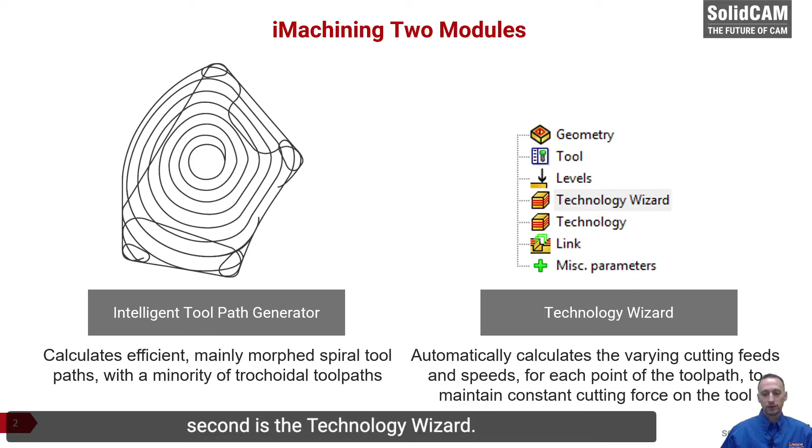So before we talk about the secrets of iMachining, let's talk about what iMachining does. So iMachining is about saving cycle time at the CNC. So here we'll go over a couple quick slides about some of the savings. So here we have iMachining 2D being used on aluminum for electronic products. And here you can see we have aluminum 6061, and this customer had 400 pieces to produce.

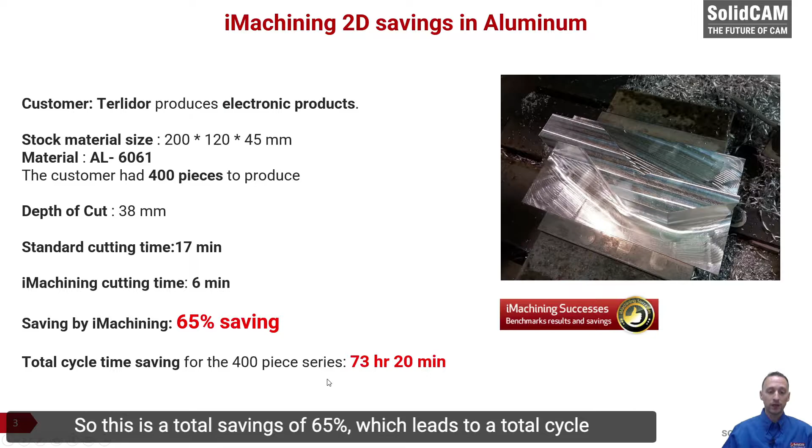Their standard machining time before iMachining was 17 minutes, and this decreased to 6 minutes. So this is a total savings of 65%, which leads to a total cycle time savings on the whole part run of 73 hours.

Here's a really small titanium little bracket. This customer had 75 pieces to produce, and this part went from 17 minutes down to 3.5 minutes, which was a total savings of 80% per part, for a total time savings for the complete run of over 16 hours.

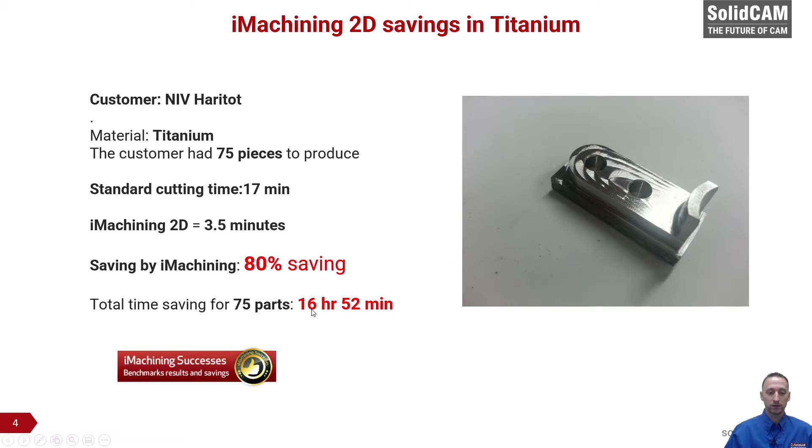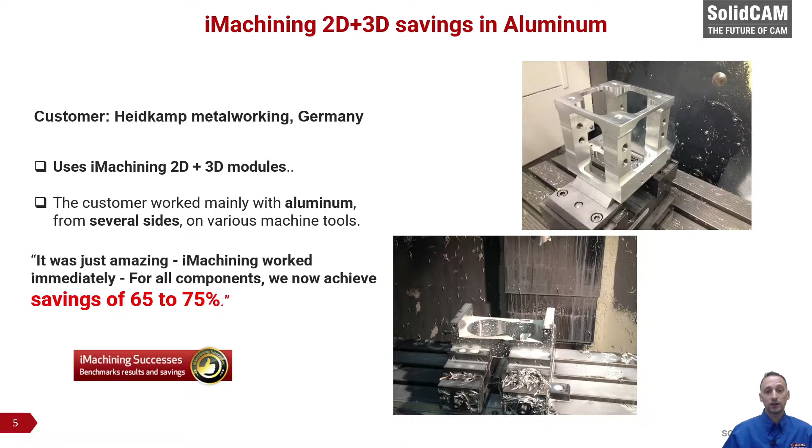We have a customer in Germany who uses a combination of iMachining 2D and 3D, which most of our customers are doing. And for them, in using aluminum parts, they're generally seeing savings of 65 to 75%. So I think what's nice to notice here is that iMachining is giving an amazing savings amount, whether you're doing soft materials such as aluminum or something very hard to machine such as titanium.

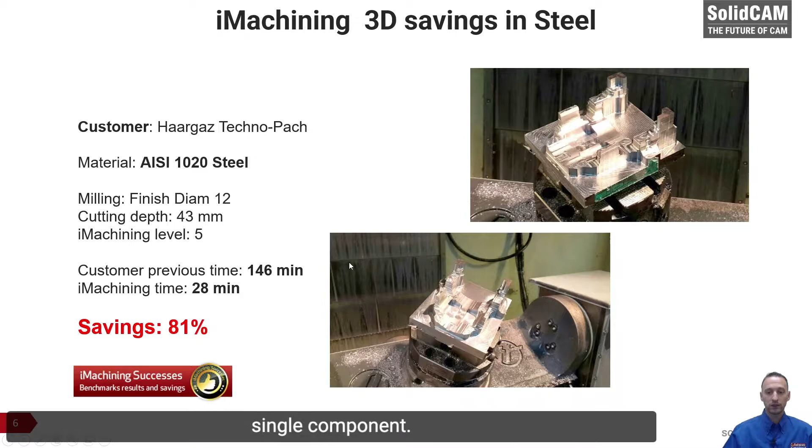Here's another part which is cut in steel, and this part went from 146 minutes down to 28 minutes for just this one single component. Now, besides the reduced cycle time of iMachining, there's another major factor on the CNC, which is reduced machine wear.

So the iMachining toolpath, and we're going to be reviewing this, is a constant load toolpath throughout the entire cutting process. So what you'll notice when most of our customers are cutting with iMachining is you see spindle load ranges in the 4 to 17%, and it stays constant through the entire machining cycle.

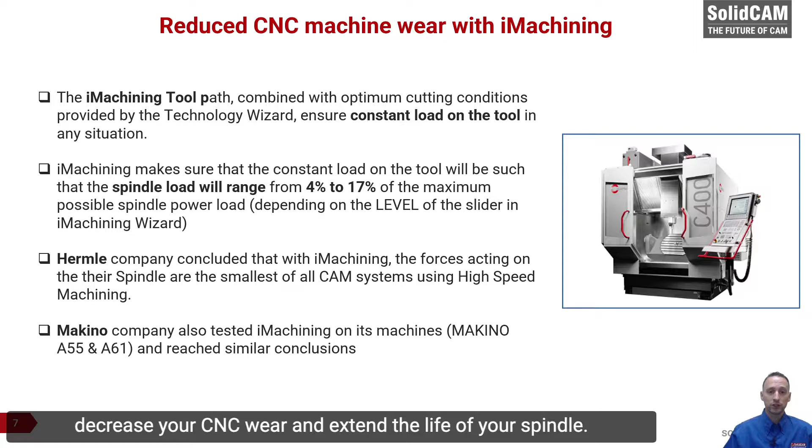Hermle actually concluded that iMachining was the best toolpath with the constant force of all high-speed machining toolpaths. And Makino also tested iMachining on its machines and reached similar conclusions. And in the end, a constant load on the spindle is going to decrease your CNC wear and extend the life of your spindle.

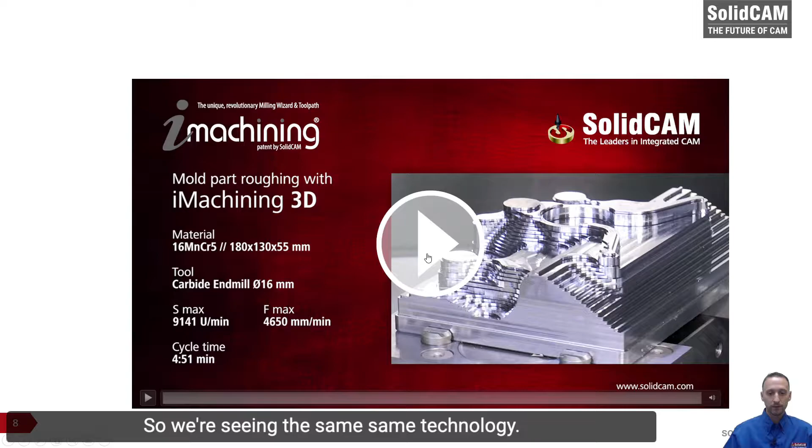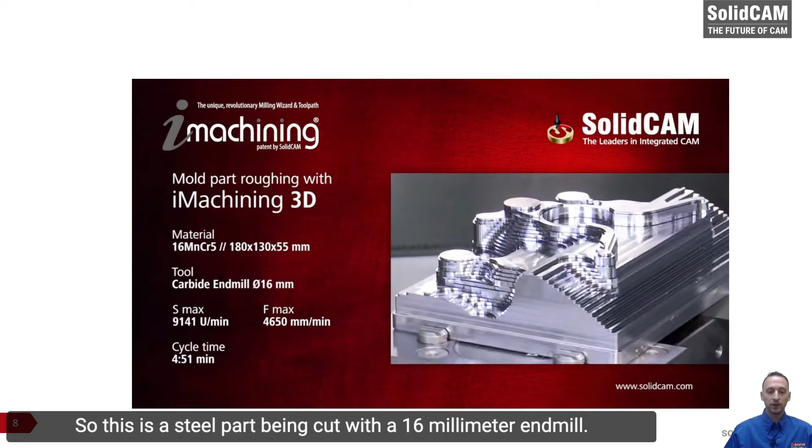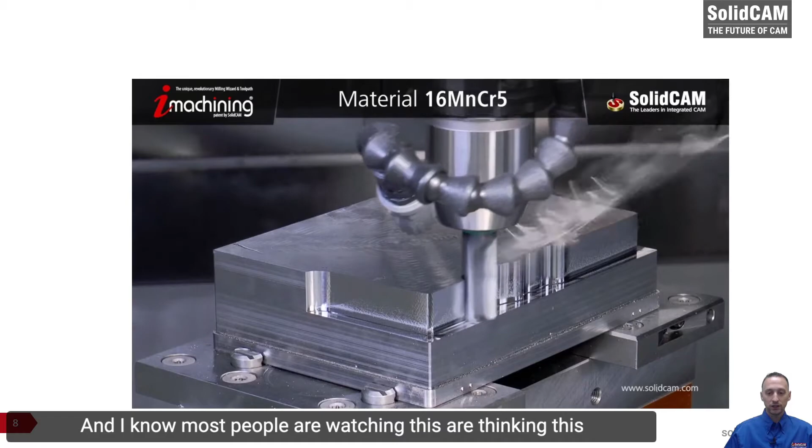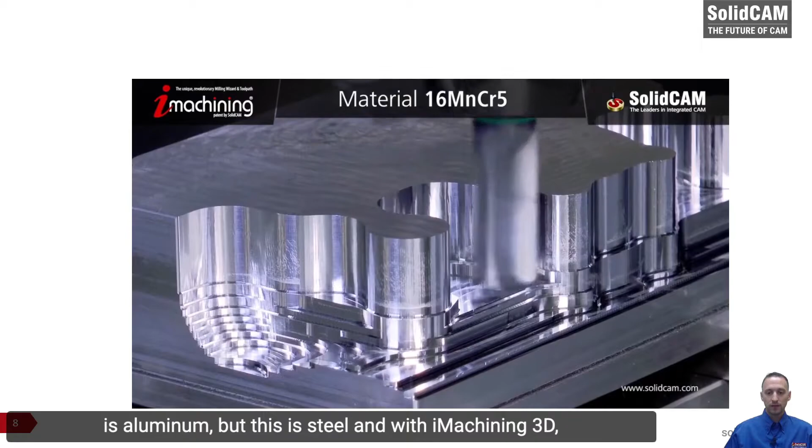So why don't we watch a quick little video on iMachining 3D. And remember, iMachining 3D is using iMachining 2D, so we're seeing the same technology. So this is a steel part being cut with a 16mm end mill. And I know most people when watching this are thinking this is aluminum, but this is steel. And with iMachining 3D, this uses our step-up technology to bring the model to a near-net surface finish.

Okay, so when we watch these high-speed machining videos online, many people are questioning, well, that's great. In a single video, you can make something amazing show. But how does an everyday customer achieve this? And I think this is really where iMachining sets itself apart from every other CAM system out there, is that our customers are achieving those results day in and day out on every part they cut. And I'm going to go over the secrets of why this works and how this works.

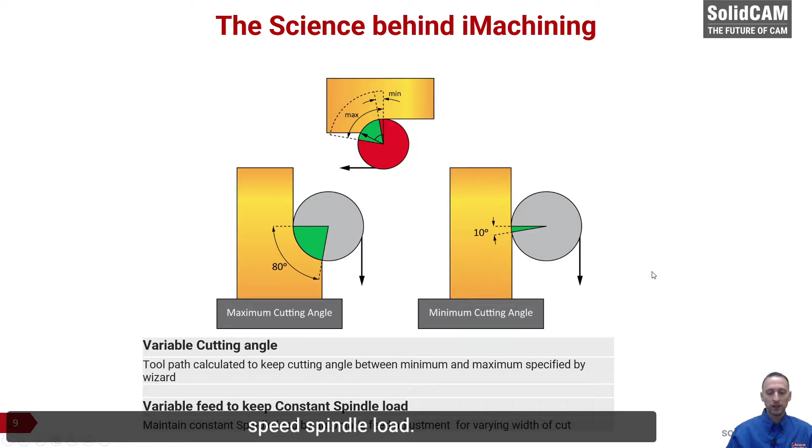So the science behind iMachining. The most important thing to note is that iMachining uses a variable cutting angle. So this means we work between a maximum range and a minimum range. And we also use a variable feed to keep a constant spindle load. Now we don't use variable feed to keep a constant chip thickness. Now, before we get into chip thickness, I have a small video I want to talk about and actually show.

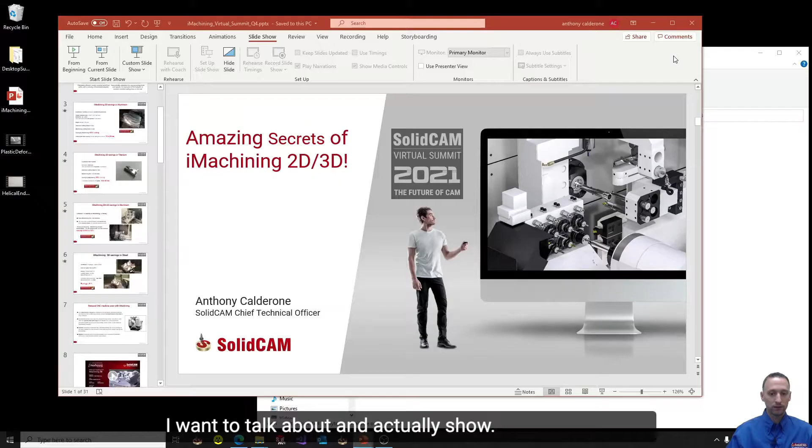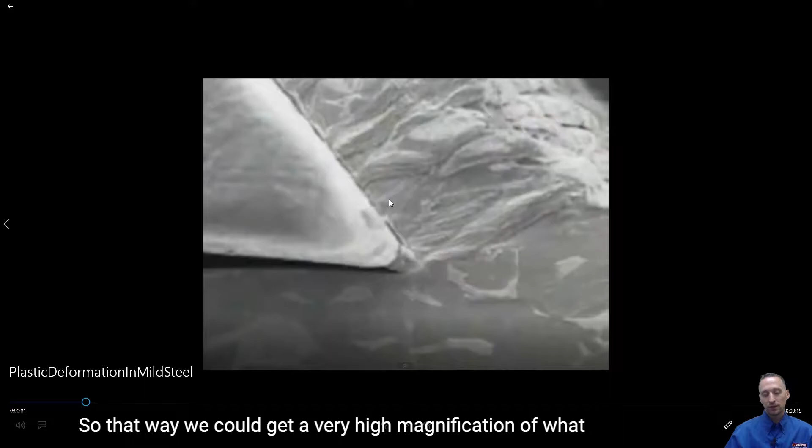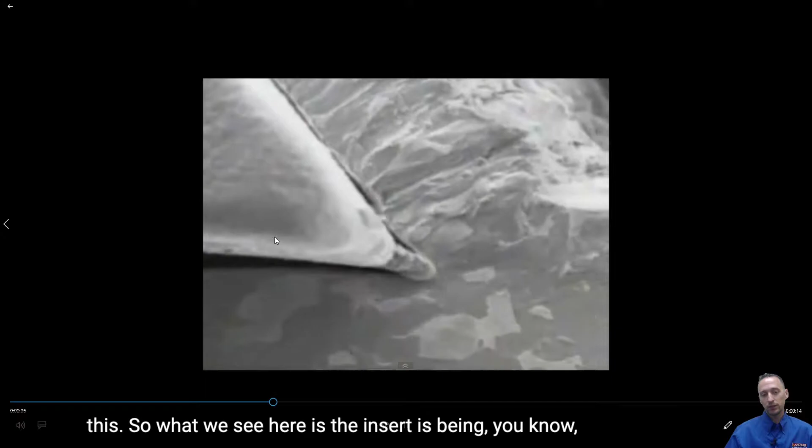So this is a close-up video of not a helical end mill, but a turning insert. So that way we could get a very high magnification of what the cutting process is. So I'm going to press play and we're going to talk about this. So what we see here is the insert is being drawn across the material.

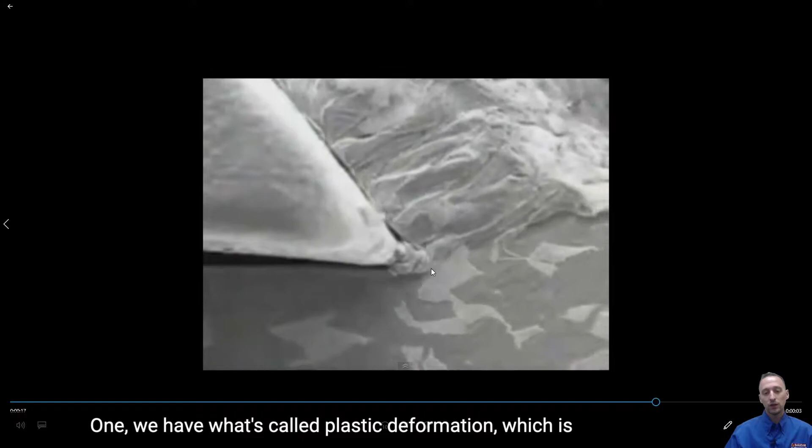And what actually happens here is two things. One, we have what's called plastic deformation, which is at the tip of the cutter, you can see that the material, press play again, is going from a solid to kind of like a soft liquid here.

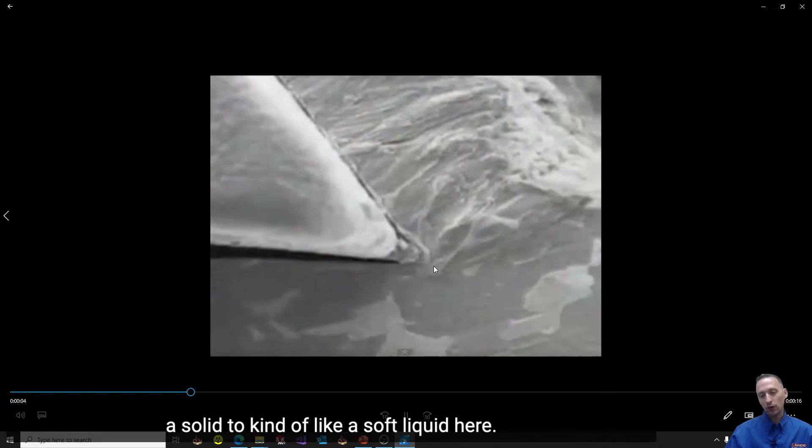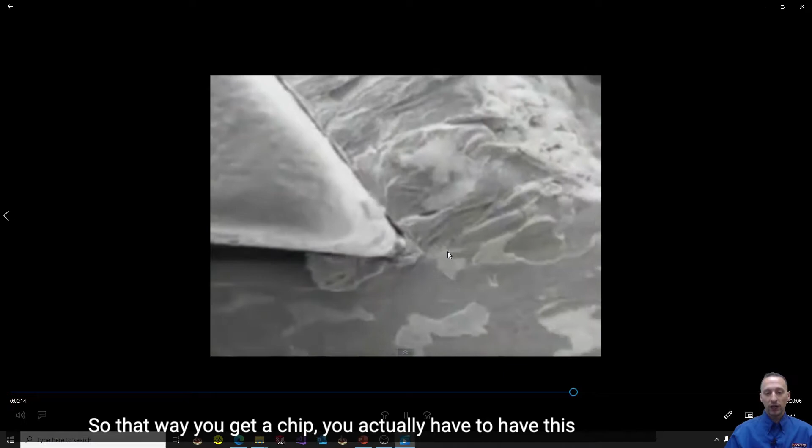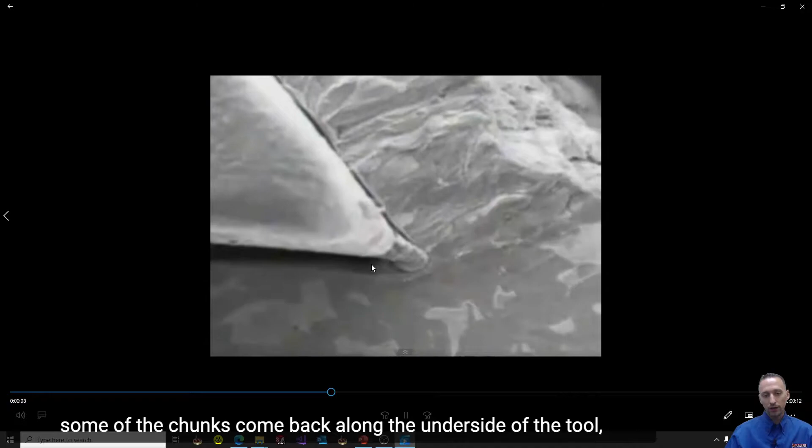And then you have shearing. So for the material to actually break the bond, so that way you get a chip, you actually have to have this plastic deformation and then the material is shearing off. As you watch this cut, what's interesting to note is that you will sometimes see some of the chunks come back along the underside of the tool, and then that rubs against the back part of the relief.

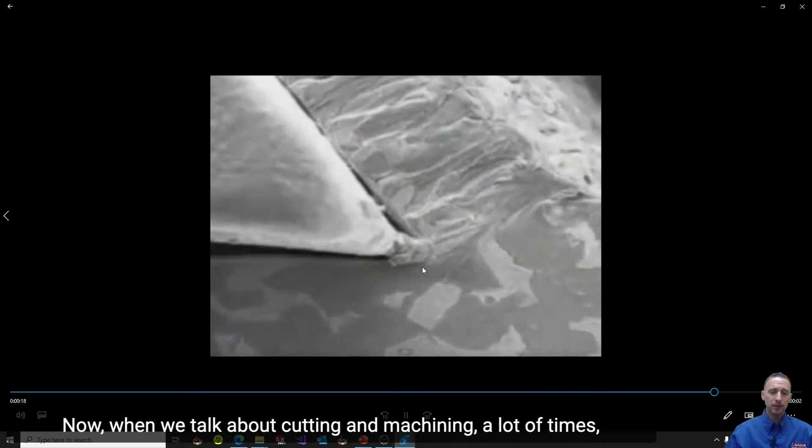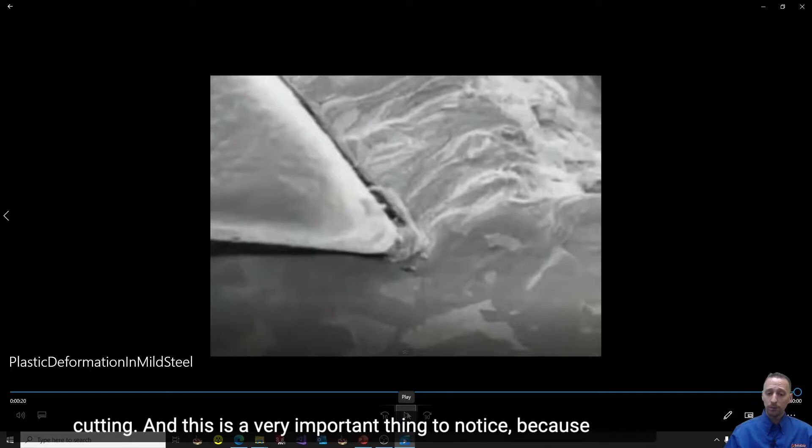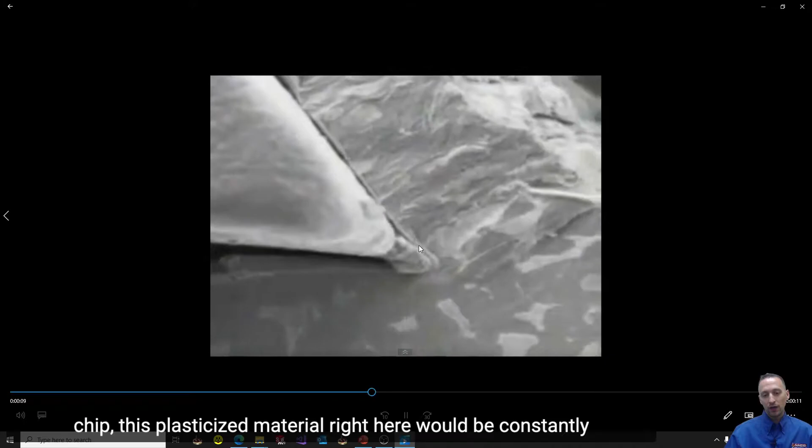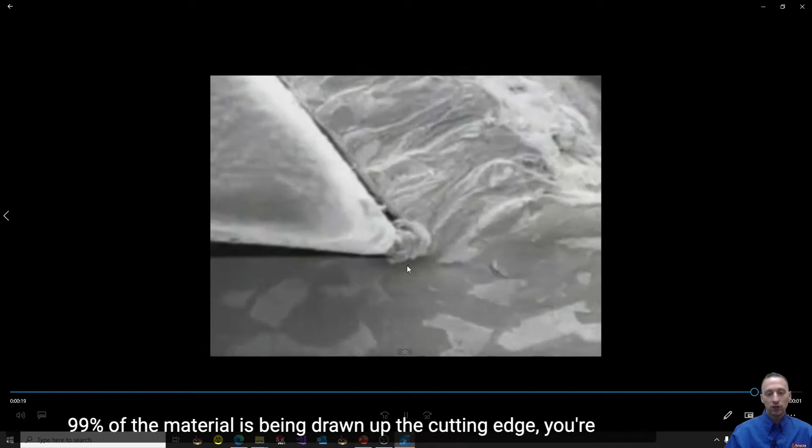Now, when we talk about cutting and machining, a lot of times people are talking about getting underneath of the material, like pulling enough chip that the tool is actually cutting. And this is a very important thing to notice, because you could imagine here, if we weren't taking a big enough chip, this plasticized material right here would be constantly rolling around the bottom, and instead of getting a nice shearing effect where 99% of the material is being drawn up the cutting edge, you're getting maybe half of the material, some will come up, some will go down, and this is a problem.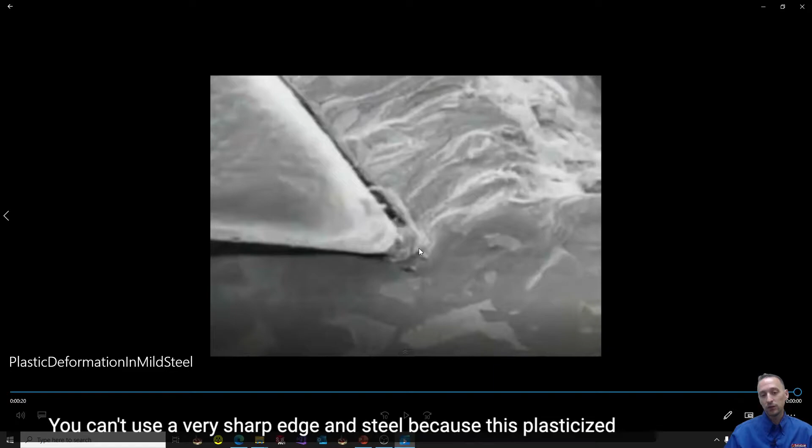And now when you do look at different tools for different materials, you'll see that this corner radius will change. Obviously with aluminum cutters, you have more of a knife edge here, and in aluminum they're able to cut more than having this brute force kind of shearing effect. But you can't use a very sharp edge in steel, because this plasticized material in steel will end up breaking down that cutting edge much quicker than it does in aluminum.

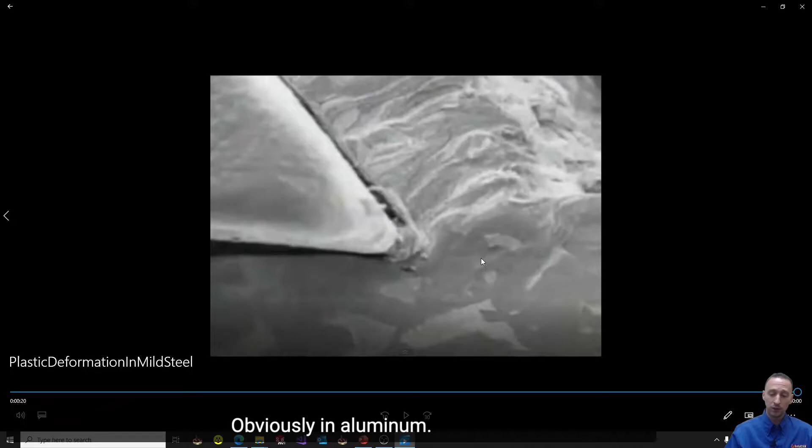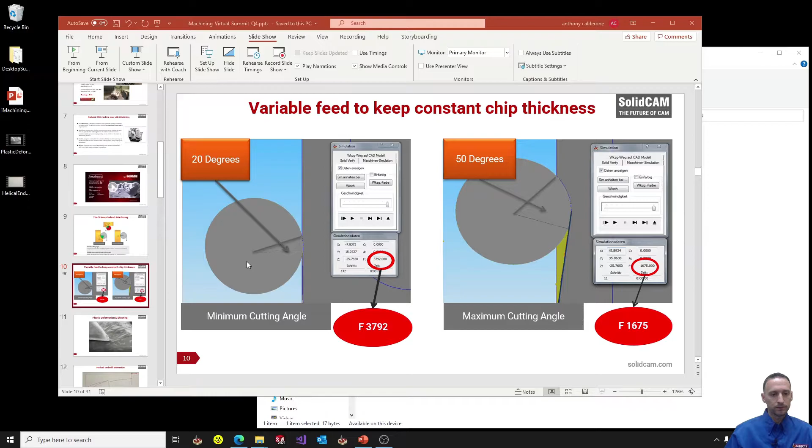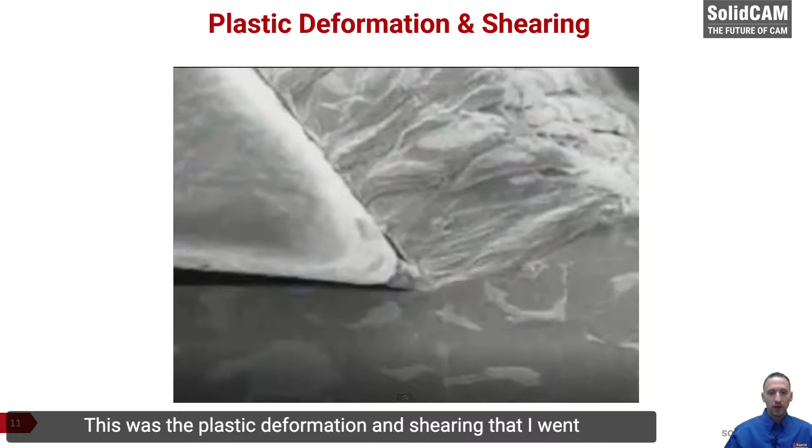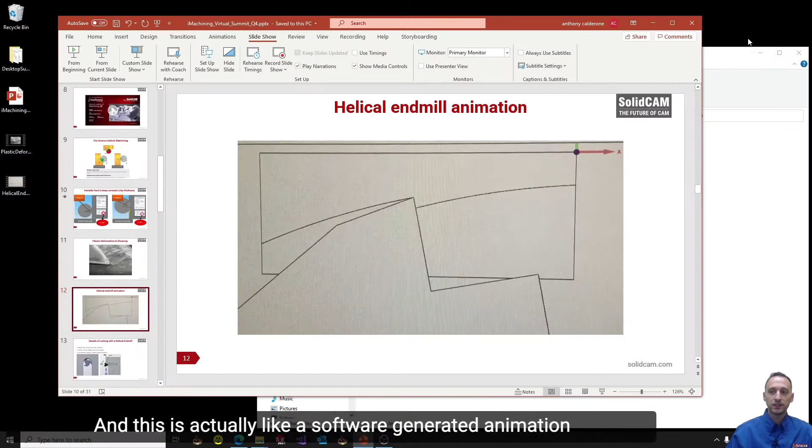Let's go to our slide again. So we use a variable feed to keep that constant chip thickness. This was the plastic deformation and shearing that I went over. And then I have one other animation I want to show, which is actually a helical end mill animation. And this is a software generated animation, because we can't actually record a cross-sectional view of what a helical end mill looks like cutting.

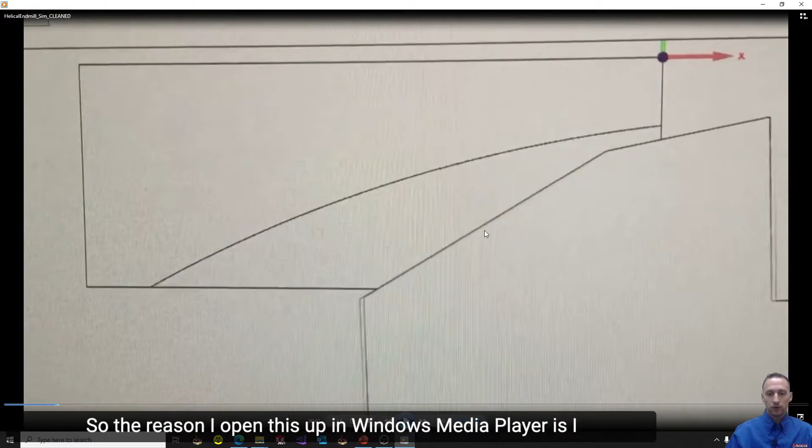Oh, I want to open this with Windows Media Player. So the reason I open this up in Windows Media Player is I am going to go frame by frame.

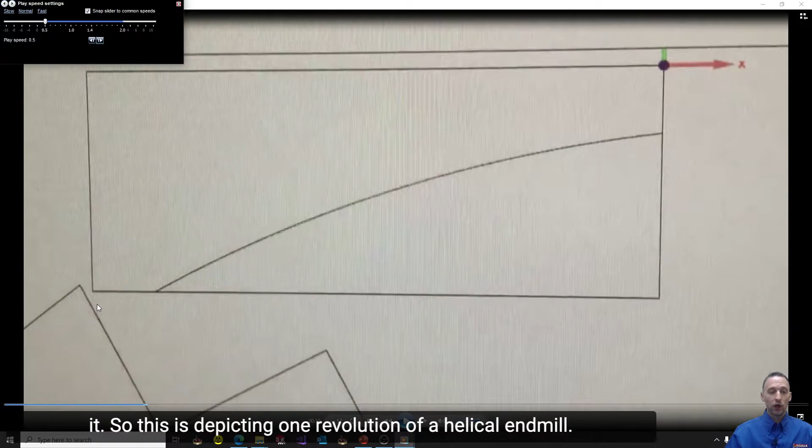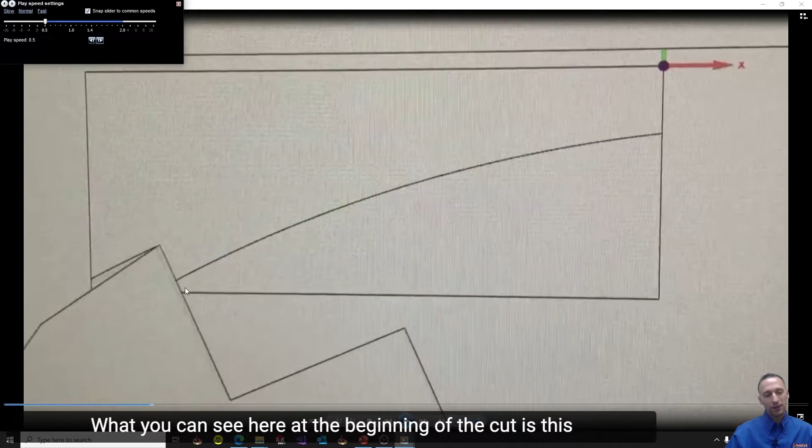Now what this animation is depicting, and when the flute comes back around I'll show it. So this is depicting one revolution of a helical end mill. And so this is the x-axis. So basically the tool is moving along the x-axis, and as the tool is moving, it's also revolving, and it's cutting. So let's look at this process. What you can see here at the beginning of the cut is this is actually our chip thickness. So this is where that shearing is happening.

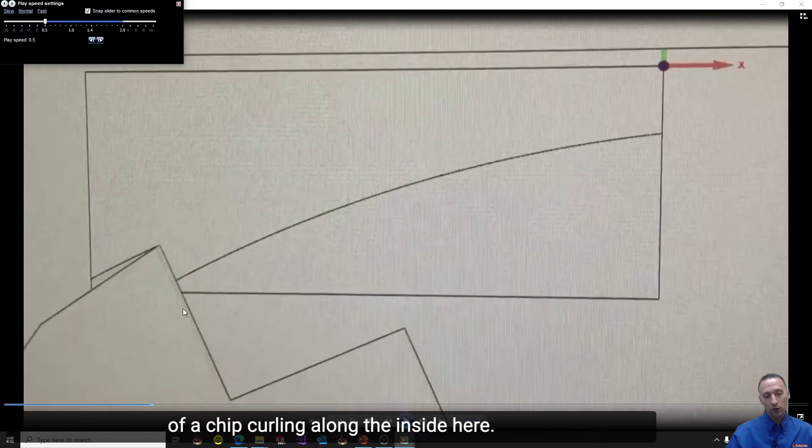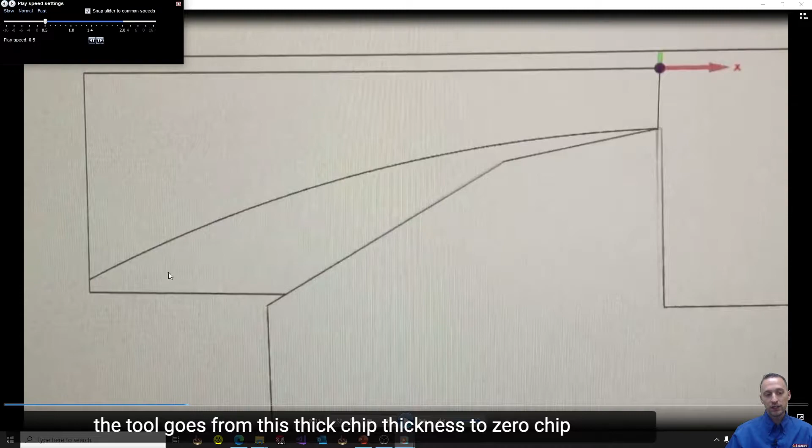So if we think about the previous video that we did, right here at this very tip, this is where we're getting that plastic deformation, and you now have material in the form of a chip curling along the inside here, and as the cutter does its full revolution, that's what ends up with one complete chip. And if we continue playing, you can see in this one revolution, the tool goes from this thick chip thickness to 0 chip thickness. So this is a very important thing to pay attention to, is that the tool is actually going from cutting its full thickness of material to 0 material at the very end.

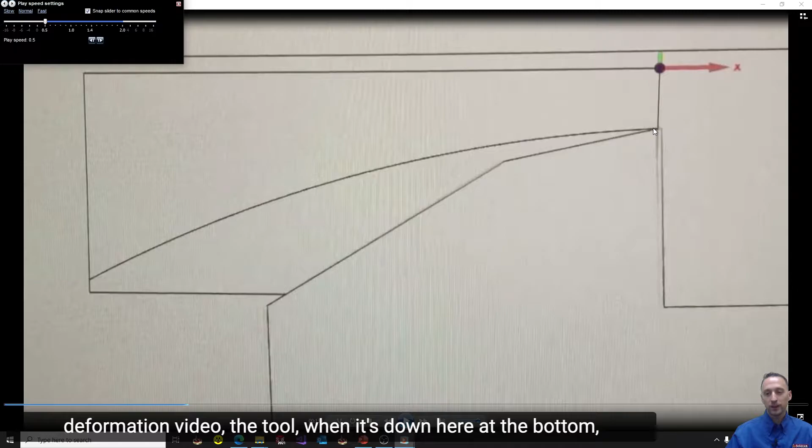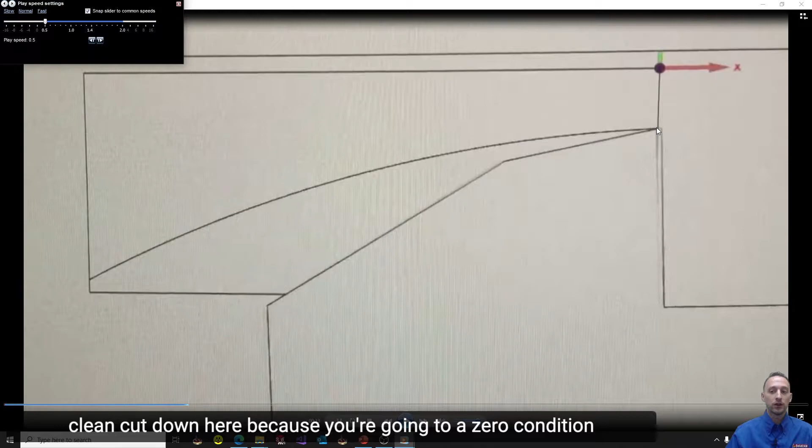So you could imagine, when you think back to that plastic deformation video, the tool, when it's down here at the bottom, you're probably not really shearing off and getting a perfectly clean cut down here, because you're going to a 0 condition and you get it kind of rolling along the back side of the tool here, and the material being plasticized, it's deforming and it can push a little bit. So this is quite an abusive process for the tool, and I'll play one more revolution.

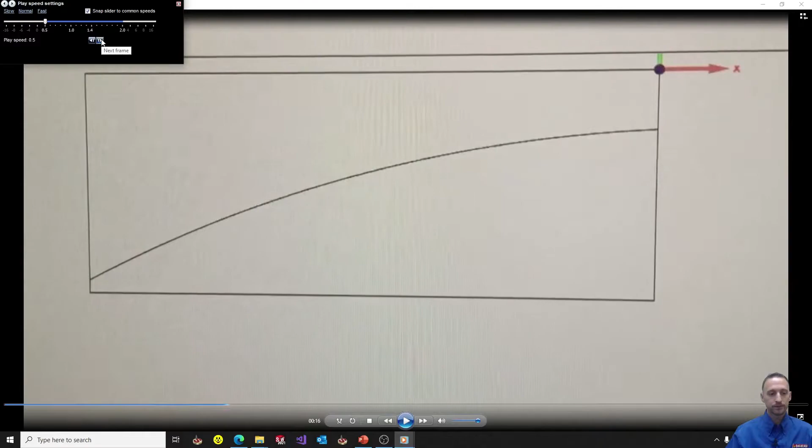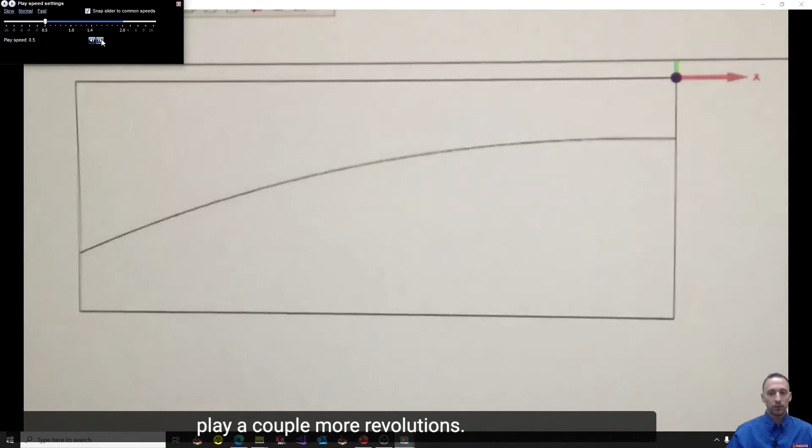So as the next flute comes around, we're going from the thickest part of the chip, it's revolving, and then we go down to 0. And I'll just play a couple more revolutions. I'll zoom in a little bit here. And once it does one more revolution, you're actually going to be able to see a little bit of the scallop on the wall.

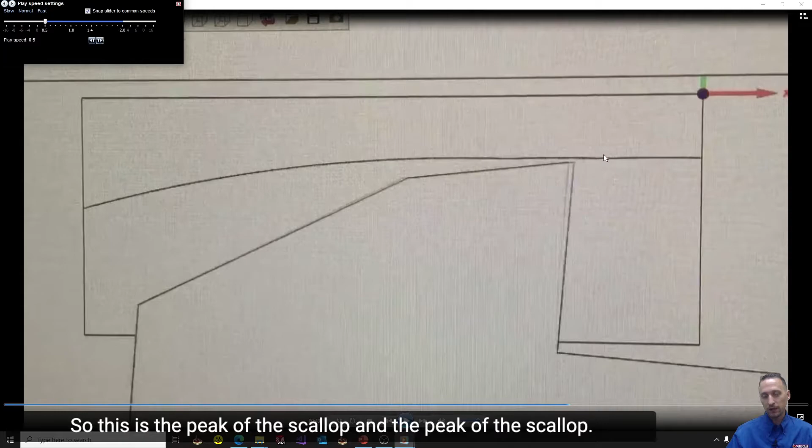So it's probably a little hard to see, but here you actually get the scallop, right? So this is the peak of the scallop and the peak of the scallop. So when we talk about the surface finish, or the Ra finish of the material, this is the height of this scallop. And one thing I think is kind of interesting to mention is that there is the theoretical scallop or surface height.

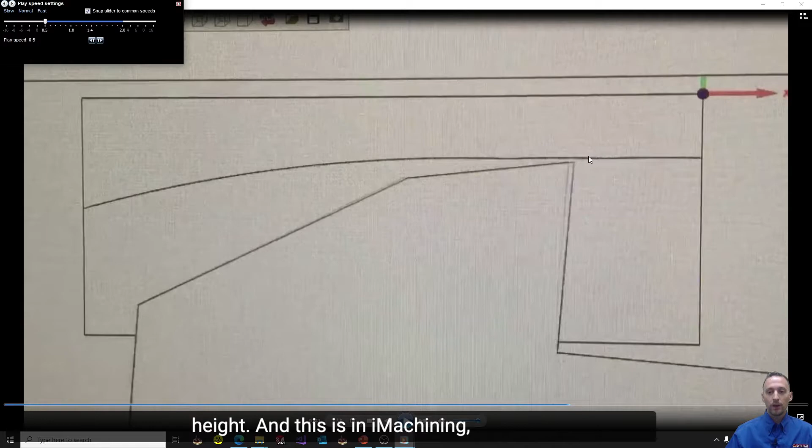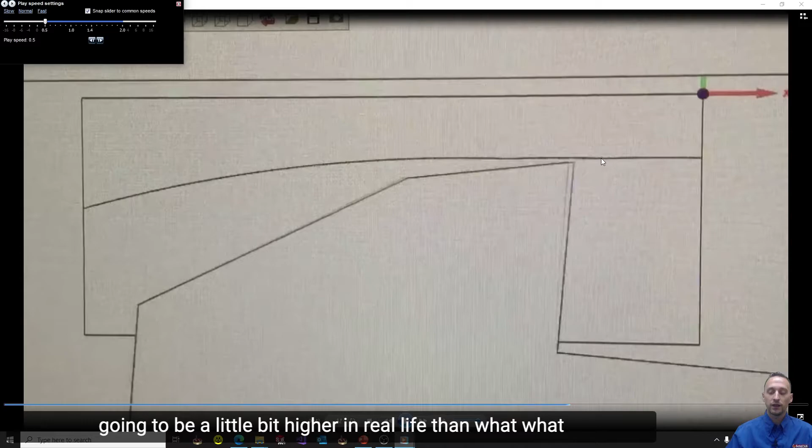And in iMachining, you can actually select the surface finish that you want. But in reality, when the tool is cutting, as we saw from that plastic deformation video, you don't get the perfect scallop like you think here. So this peak is probably almost always going to be a little bit higher in real life than what the theoretical perfect scallop would be.

Now we'll go back to our presentation from the current slide. So we talked about the helical end mill, so let's talk a couple things about climb, conventional, and full slot cutting. If we were to take that helical end mill and do a full slot cut, which is depicted here on the left, you can see that the tool would actually be going from the thinnest part of the chip, reaching the thickest part at 90 degrees, and then coming back down to the thinnest part.

Now you can imagine, if you're cutting something like aluminum and you have a very sharp cutting edge, it might be okay when you're starting down here at the thinnest part of the chip, but it's still not good for the tool, because it needs to deform that chip right there at the cutting edge, and it needs to plasticize it enough that it can shear it off. So anytime you're starting with conventional cutting like this, you're not getting cutting right away, and that's bad.

So realistically, when you're doing conventional cutting, the tool is probably not really pulling a chip until it reaches about here, or maybe here in the cut. So that whole time, the tool is really just jamming itself, and rather than a chip being formed, you're getting that glob of material rubbing along the back side of the flute on the relief, which is really bad.

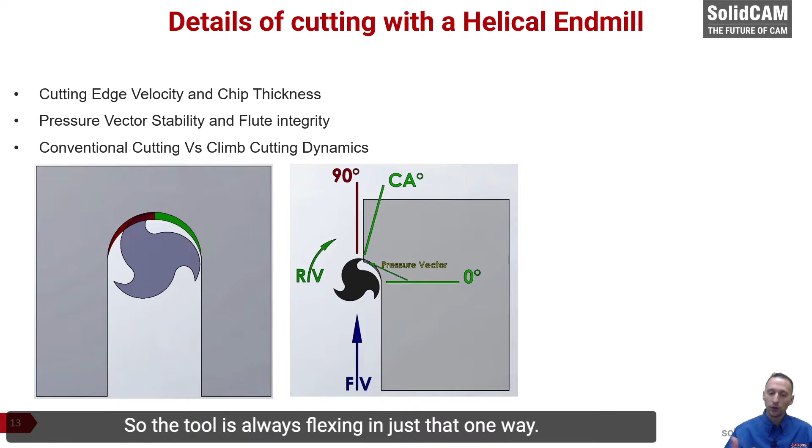So iMachining is limiting itself to this 80-degree range, so that way we're always climb cutting and keeping that cutting direction the same, so the tool is always flexing in just that one way.

Chip thickness and chip load: are they the same? As we know, if we open up a machinist handbook, everything is going to be about chip load. And chip load refers to the amount of chip at 90 degrees. So this is the thickest part of our chip. Chip load and chip thickness are the same value at 90 degrees. When we are actually cutting not at 90 degrees, the chip thickness no longer matches chip load. So let's say we had the same chip load and we're trying to run a chip load of 4 thou.

When you are cutting less, let's say 40 degrees, the chip thickness is actually not 4 thou. So what does that mean? That means the tool, let's say for that material on that tool, it wants to reach a 4 thou chip load or chip thickness where the tool will properly shear away the material from it and form a nice chip. Well, if you're going less than 90 degrees, your chip thickness is actually smaller.

And if we come all the way down to like 10 degrees, here's this little graph. You can see the original chip load is here. This chip thickness is very tiny if you don't increase the feed rate. So what iMachining does is we actually adjust the feed rate so we have a constant chip thickness. So if this tool wants to have a chip thickness of a certain distance, we need to maintain that. And if we look at 80 degrees, you can see that 80 degrees is pretty close, but even at 80 degrees, you need to adjust chip load to have a constant chip thickness.

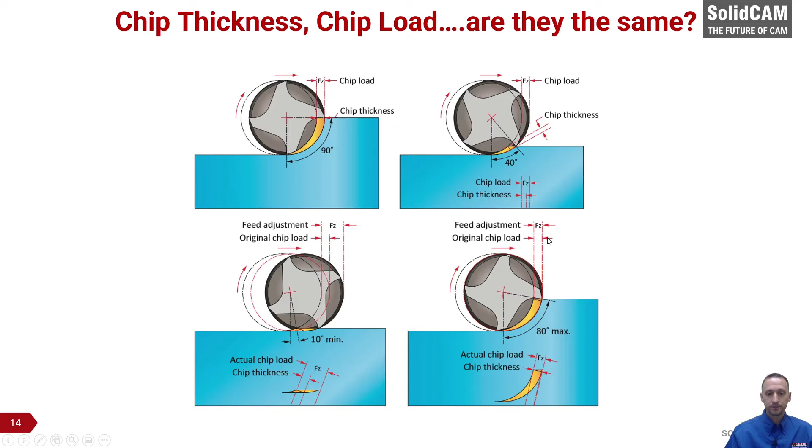Another important part of getting a constant chip thickness through the cut is feed of the center of the tool versus the edge of the tool. So if we think about runners on a racetrack, the runner on the inside track is always staggered further behind everybody else because he has the shortest linear distance around the track. The same thing is happening with an end mill because the CNC is controlling the feed rate at the center of the tool. But the reality is the cutting is happening at the edge of the tool.

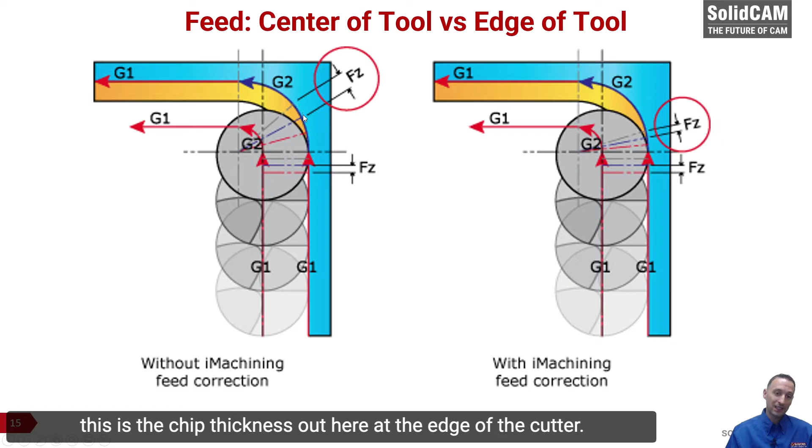So what we do in iMachining is we adjust feed rates on arcs or linear segments that represent arcs. This means on internal corners, we are actually slowing the feed rate down so we can get a constant chip thickness. If we don't correct the feed for an internal corner, you can see that FZ, the chip thickness out here at the edge of the cutter, is huge. We want this FZ right here along the straight wall. You can see up here it's about 2 to 2.5 times larger. Now when we correct the feed rate and slow down for internal corners, the same chip thickness that we have on a straight line is the same that we're getting on an arc.

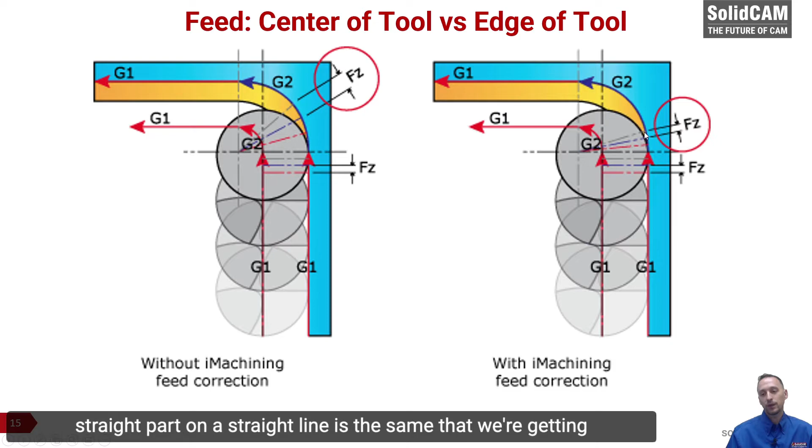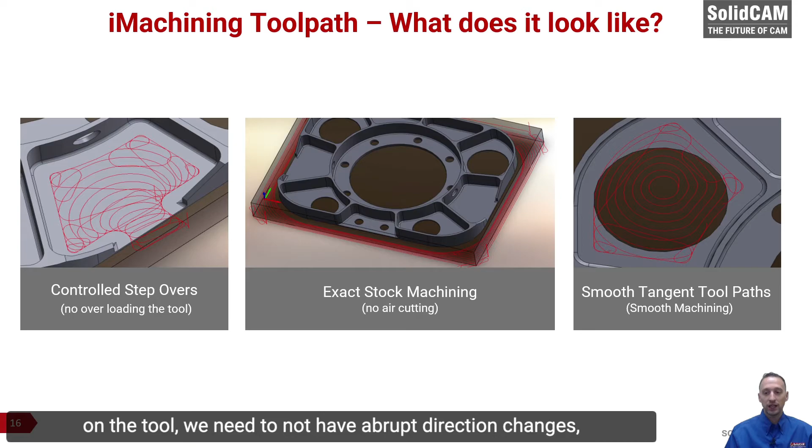So what is an iMachining toolpath and what does it look like? A couple main things you're going to note with iMachining. One, we have controlled step overs. So you're never going to see any overloading of the tool, and this is a lot of the engagement angle stuff we were talking about. You're also going to notice that there's exact stock machining. This means there's no air cutting, and this is important because we manage how much of the tool is actually engaged with the stock at every part of the cutting. And then we have smooth tangent toolpaths. If we want to control the load to be the smoothest on the tool, we need to not have abrupt direction changes, and you should see something smooth and tangent the entire time.

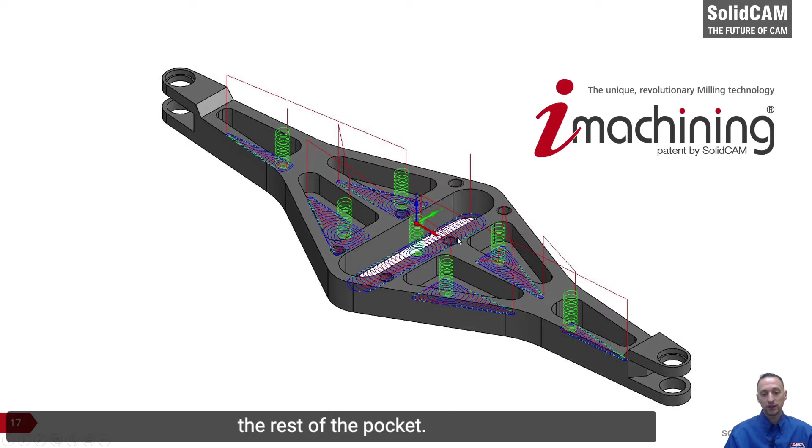So here's a part with several pockets in it. Generally what you're going to notice with iMachining is, if it's a closed pocket, you're going to see a helical entry into the center of the pocket. You're going to see a morphing spiral from that circle out to whatever the shape of the pocket is. And then you're going to see parallel passes to clear out the rest of the pocket. This general process you're going to see no matter what the geometry is.

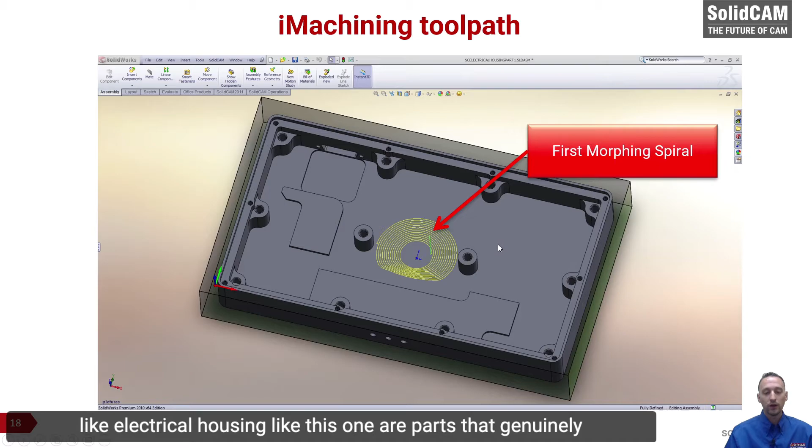Now here we have an example of a pocket with some islands. Generally with a lot of our customers, we don't see many pockets that have islands in them. It seems like electrical housings like this one are parts that generally have multiple islands, or at least more than one island. But this is a nice example to show the process of what we do.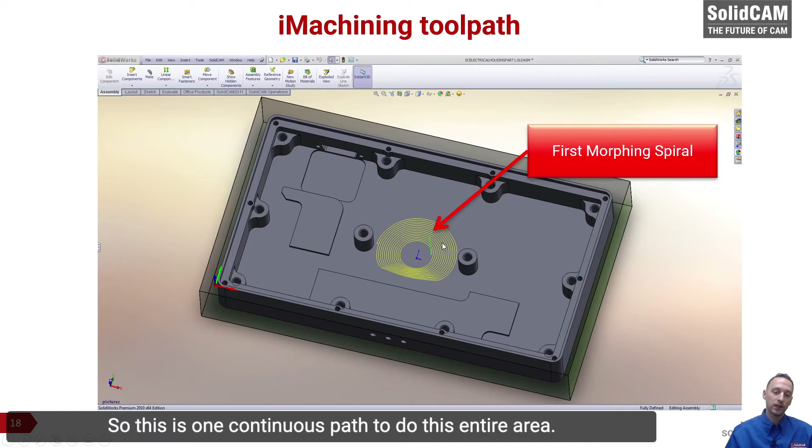So first we have a morphing spiral. Normally you'd see the helical entry, but we pre-drilled the hole so we didn't see the helical entry. It plunges down into the hole. This starts from a circle, and then look at the shape it morphs out. You can see more dense toolpath down here and a higher toolpath up here. So this is one continuous path to do this entire area.

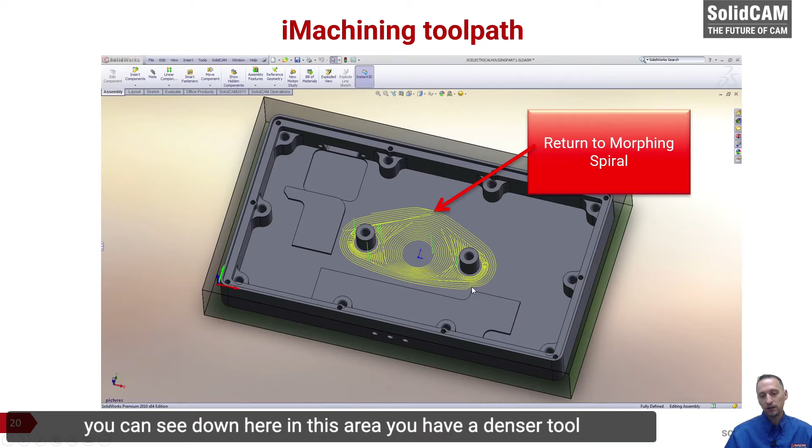When we hit the islands, we have what we call separating islands or separating channels, and these go around the islands, and after the islands are done, we are now able to go back to morphing spirals. And once again, with the morphing spirals, you can see down here in this area, you have a denser toolpath, and along the other areas, you have a thicker toolpath. Then we run into an island again, so then we make a moat around it, and then we go back to our morphing spiral. So that's the basis of what you see with the iMachining toolpath.

Now, what do we do when we run into iMachining 3D? So as you saw from iMachining 3D, we do Scallop Step-Up. And what is Scallop Step-Up? What this does is we give a constant net surface finish across the entire model. And so all the user has to do is say what scallop he wants, which is the distance from the final target model. And then iMachining automatically calculates different step downs and step ups to achieve that.

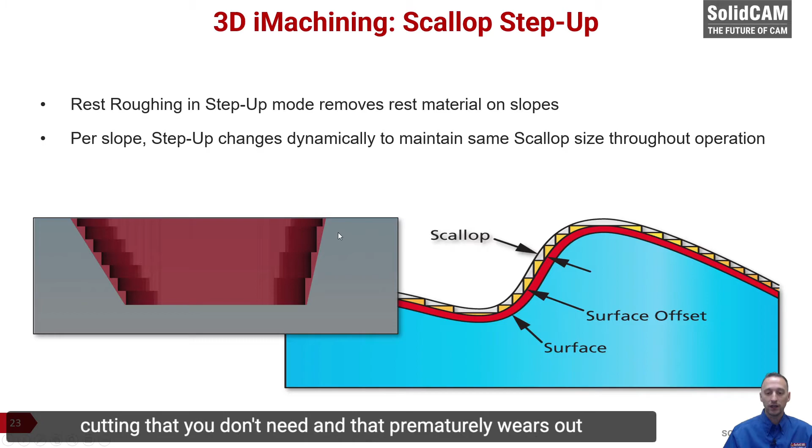This makes the toolpath extremely optimized, and it makes the toolpath not do excess cutting, as opposed to what a lot of people have to do, which is just pick the smallest step down possible, and then you just get a lot of redundant cutting that you don't need, and that prematurely wears out the tool, besides it being a much longer cycle time. iMachining 3D also has minimal repositioning.

So you can see, like in these pockets, this is just rest machining. The tool is able to stay down through all the machining. This minimal repositioning is a huge time savings at the CNC. And I think everybody is used to seeing in the CNC, every time the machine does rapid moves going from one spot to another spot, it can be some of the slowest times in the machine because the thing's just coming from this area, bouncing over, coming over here. And in 3D, this happens a real lot because you have a complex model, so it's cutting over here, it's cutting over there, and it goes around to the different areas.

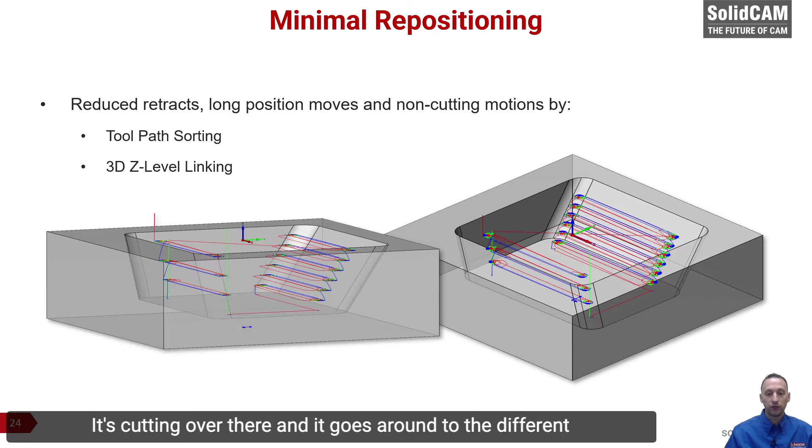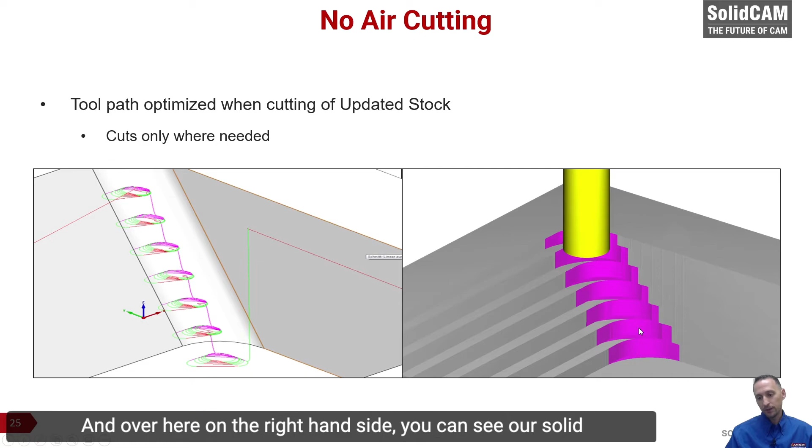We also have no air cutting, as I said before, so this is whether it's iMachining 2D or iMachining 3D. We are only cutting areas where there's material. I mean, this is just a beautiful example of just cleaning out this corner. And over here on the right-hand side, you can see our solid verification, and the purple color is just showing the area where the rest machining is accounting for.

Now, besides just the toolpath side, we now have a problem with feeds and speeds, and this is the second part of our module we talk about. When we're doing the machining process, we have the material, the tool, the geometry, and the machine. So what does this mean? This means for the material, us as programmers, we need to take into concern the cutting speed, the hardness of the material, min and max step overs.

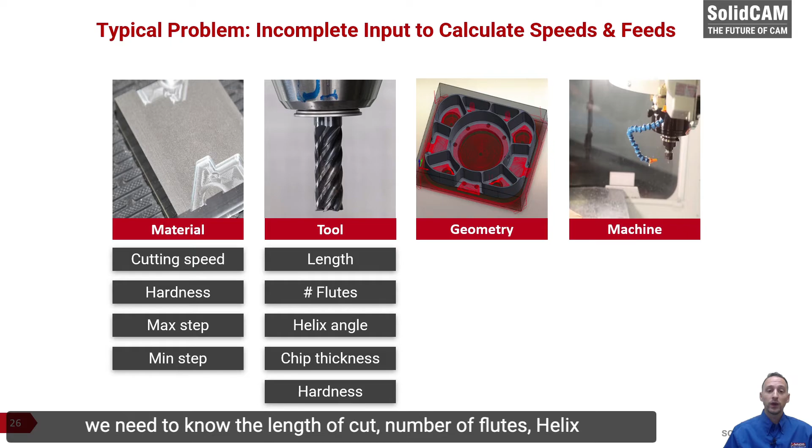For the tool, we need to know the length of cut, number of flutes, helix angles, chip thickness, hardness. For the geometry, we need to know the depth of cut. For the machine, we need to know the spindle speed, the maximum feed rates, the maximum horsepower, the memory size of the machine. And these are all variables that we, as a programmer, have to manage.

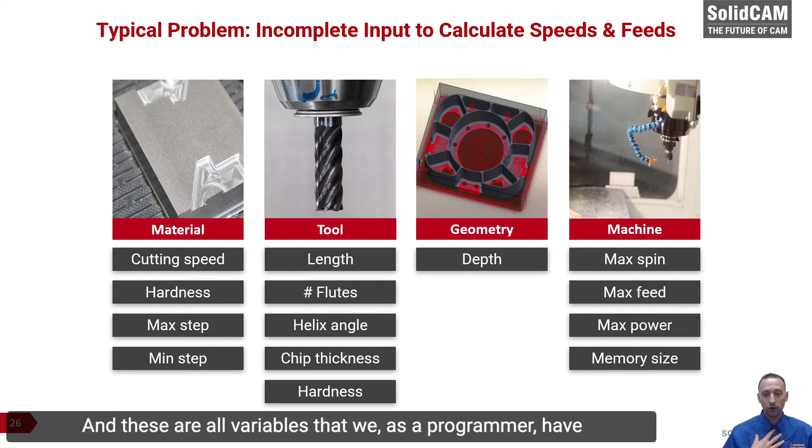The solution here is the iMachining Technology Wizard. What the iMachining Technology Wizard is, it takes all the guesswork out of all of that. And what it does is it takes in machine, material, geometry and tool. And the final result of it is it gives you a combination of feed rate, step over, spindle speeds, and depth. And most important is it synchronizes all of this for you. So whenever anything changes that needs to be adjusted, the iMachining Wizard handles all of it together.

For instance, you might just have to be able to adjust for the maximum RPM of the machine. Well, at some point, if you try to run your machine at, let's say, 16,000 RPMs all the time, your feed rate might actually be too fast for you to hold the chip thickness that this toolpath is requiring.

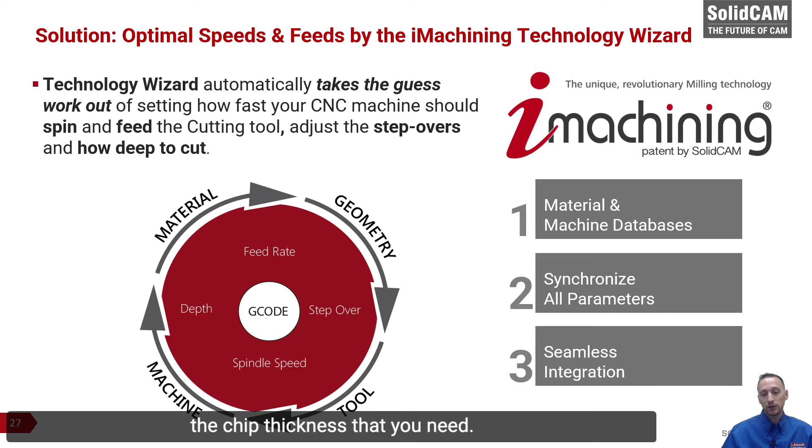So you actually have to have a lower spindle speed to hit the chip thickness that you need. The iMachining Technology Wizard is taking care of all of this for us. The iMachining Wizard also has our slider. And what does this mean?

This slider is here because iMachining is not able to understand 100% of the process of what's happening at the CNC. This is why we still need a CNC programmer who is using his intelligence to understand the fixturing, the tooling. Is it a really long extended tool? What type of vibration problems are you having?

So the iMachining slider gives you the ability to go from the lowest level to the highest level with interpolated steps. Most of our customers are able to go right to level 6 and have great success cutting right out of the box. But if you know you have extra vibration or weak fixturing, you can lower the machining level down, or you can bring it up if you know you've got a nice stubby tool and really good fixturing.

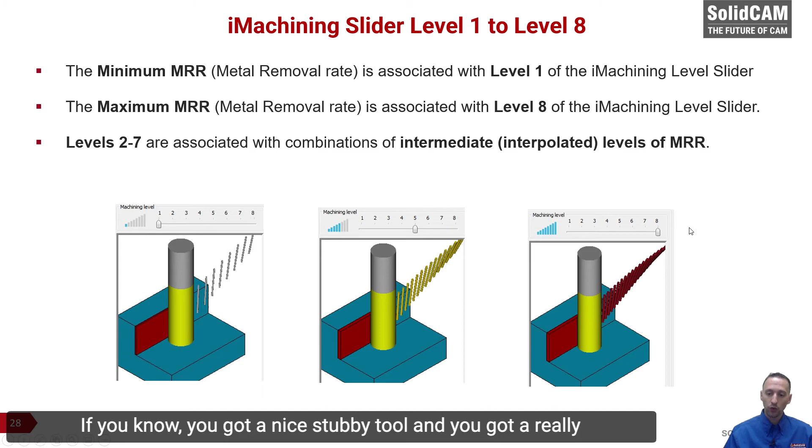Another part of why iMachining works so well is helical endmills have something that we call axial contact points. The way I like to describe axial contact points is with an actual shell mill doing facing. So let's say you have a 4-flute shell mill. When the tool first enters the material, we hear the dunk, dunk, dunk of each insert hitting the material.

And then once you get 180 degrees of the face mill fully in the material, you hear it quiet up, right? So you hear the dunk, dunk, dunk at the beginning, and then you just hear that constant sound. And then at the very end, when the tool breaks out of the material, you hear that dunk, dunk, dunk again.

And when we look at the surface finish of a face mill, you always can see the beginning of the cut when the tool is trying to enter. Then you see the cut along the entire geometry, and then you see the end result. This is because you have multiple teeth or multiple inserts in contact with the material, and that gives a stability to it. The same thing is happening with helical end mills.

If you have less than 1 flute in contact with the material, you know what you're going to have? Vibration. Every time the tool revolves, you have the tool loading and unloading entirely. So it's going dunk, dunk, dunk, dunk, for however many RPMs you're doing, times the number of flutes.

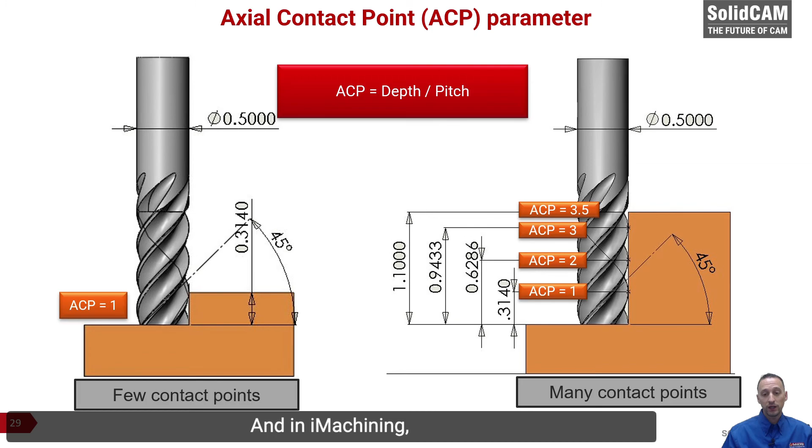When you do deep depth of cuts, you get multiple axial contact points. This puts multiple teeth in contact with the material, and you get silent cutting. There's no vibration. And in iMachining, we give feedback on that. So those are some of the secrets of why iMachining works.

This was not meant to be a presentation on using iMachining in SolidCAM. I'm really excited to be able to talk about the technical aspects of iMachining because this is really what separates us from our competitors. We care about the machining, and we care about all the load and the cutting that is happening at the CNC.

A lot of the things that I talked about in this presentation are the same things that Ken talked about in his interview. I tried to give a graphical depiction of what was going on, and I hope everybody really understands that not using iMachining in your machine shop is really a disservice, and it is the single biggest thing you can do to decrease your cycle time and get more machining capacity.

And I will end the presentation with the best quote I think I ever heard, from Greg Burns: My hope is that not too many people learn about iMachining because it is my biggest competitive edge. I think Greg says it perfectly, and it is the truth.